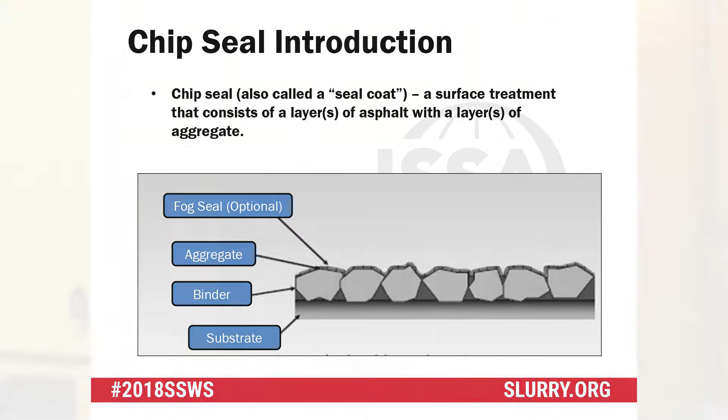So chip seal, also known as a seal coat, all it consists of is binder being placed on a roadway and aggregate being placed on top of the binder. That's it, pretty simple. It sounds simple, right? But sometimes it's not that simple when we construct these things. There's just so many variables, and we'll talk a bunch about those variables today.

So what's the benefits of chip seals? Well, it's going to increase the skid resistance. We're going to seal minor cracks, okay, we're not talking major, just minor cracks, 1/4 inch or below. It's going to extend the average service life 5 to 10 years, and that's a pretty big range, 5 to 10 years, but it's really dependent on the existing surface condition, right?

Because sometimes we have a surface that's maybe not in its optimal state to put a chip seal on, but we do it anyway because we just need to. It might be more of a stopgap measure, okay? So that's why this range is kind of so big, it really just depends, okay? It's going to correct deficiencies, raveling, flushing, aged, oxidized pavements.

What does it not do? It does not provide structure. Anybody over there yesterday in micro slurry, did they talk about that over there too? Pavement preservation is not really there to provide structure, okay? So we're not going to increase the load bearing capacity, nothing like that.

We're not really going to smooth out a rough ride. Usually a lot of times if your road's rough, you put a chip seal on, it's going to be rough again, okay? It's not going to bridge cracks wider than 1/4 inch. And then any ruts you have out there, it really needs to be very minimal rutting. I mean, we start getting into 1/2 inch or greater, what's going to happen?

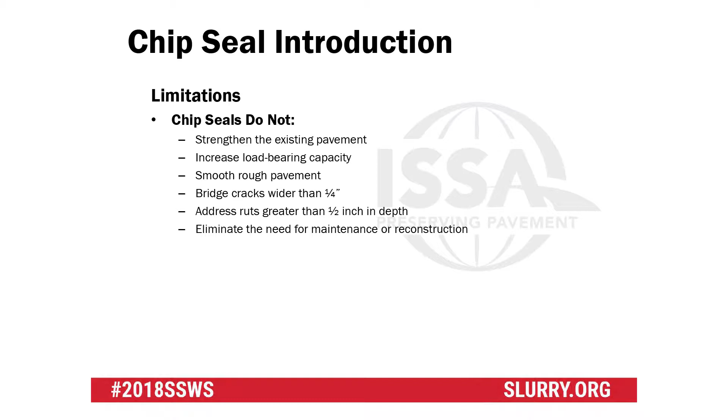Where's all your emulsion going to go? Or binder? Into the rut. And then what are we going to have? We're going to have a bleeding situation, a bleeding chip seal in the wheel paths, okay?

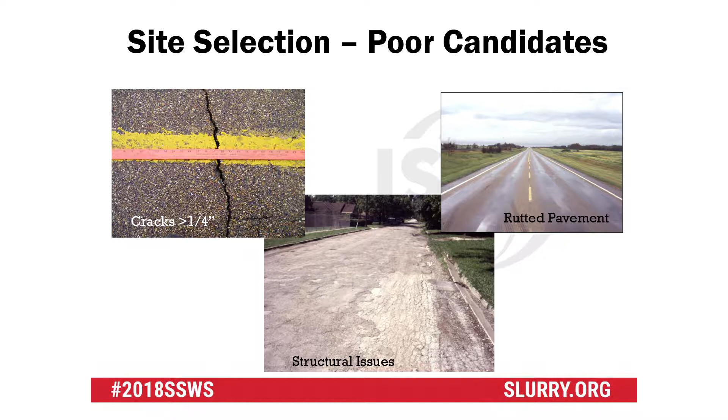So there's just some pictures of poor candidates up there. I know you can't see the ruler, but that's actually a crack that's greater than 1/4 inch. And then you see severely rutted pavement on the top right, and then just structural issues. This goes for any treatment you'll probably see or talk about this week, we need to make sure we have a good base.

A fog seal is not going to correct structural issues like that. I had a county one time call me out, wanted a fog seal on a road just like that, wanted to know if that would work. I had to tell it straight: yeah, it's probably not going to work out very well for you, but yeah, we can do that if you really want to waste your money. We need to make sure we have a good base structure out there.

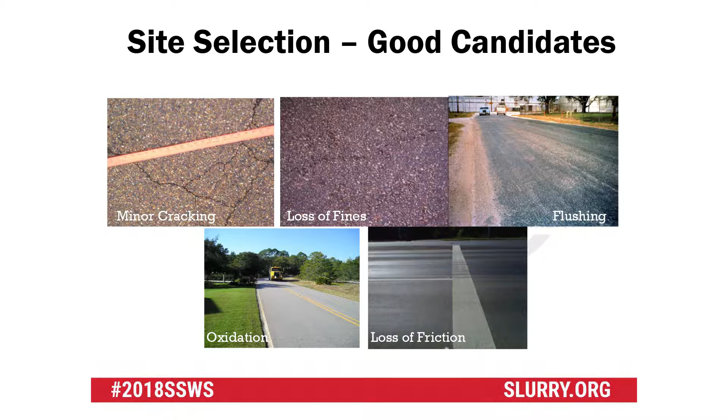So there's some of the candidates that are good: minor cracking, like I said, 1/4 inch or less, loss of fines, really slight flushing, oxidation, and loss of friction. Okay, so that chip seal should give you great friction numbers.

So where do we really want to treat it? We want to treat it at the top of that curve, right? Whether it's micro, slurry, crack, whatever, fog, we want to treat it at the top of the curve so we can spend our money very wisely, a very minimal amount. I think Scott Bartlett had a great presentation on his program, and a lot of his treatments are at the top of the curve. That's why he can improve the PCI of his network.

But sometimes we have a little stopgap measure, and I know when we were up in Fairfield, we talked about this summer with Scotty Bartlett. Sometimes you just got to do that. Sometimes there's just no choice. You don't want to, but you might have to do a stopgap measure.

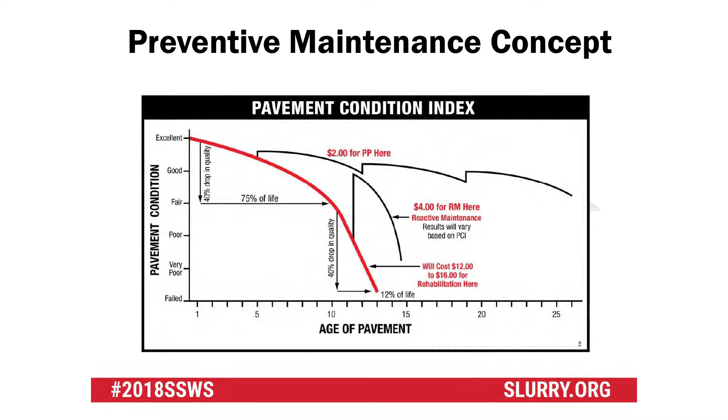And it's going to cost you a little bit more, but you can see what happens, right? It's going to go up initially, but then it's going to start dropping off pretty quick. The warts start to show themselves really, really quick in that. But hey, if it gets you 4 years, 3 years, 5 years, and that's all you're expecting, then that's good. It's all about the expectations of what you're wanting out of this treatment. If you do a stopgap measure with a chip seal and you're expecting 10 years, you're going to be disappointed, very disappointed, okay?

So you can see where chip seals fall, that good to fair category. Some of the treatments above that, below that, just showing you there where all the treatments fit on the curve.

All right, so let's move on here to material selection. Let's talk about aggregate first. So what are the functions of all this aggregate we're going to put out on the road? One is just to resist traffic abrasion, something for the wheels to drive on, improve the surface friction. It's just there to really let you go across that road. What the most important part probably is below that, that seals the road.

But what kind of aggregate do we want? Well, here's some of the factors that you probably want to look at or needs to be a part of a spec for aggregate: type, particle shape, toughness, soundness, gradation, cleanliness, and then absorption.

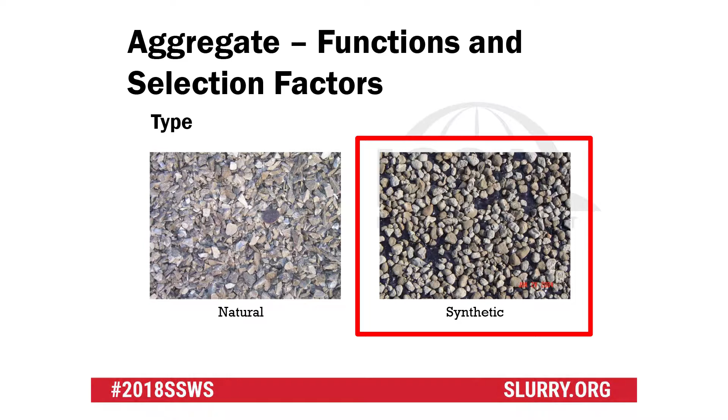So type. What would be an example of a natural aggregate? Granite, or limestone, all right? Something we find in gravel in some places. That's natural. What's synthetic? Maybe lightweight aggregate, something like that. Yep, that's synthetic. So both of these will work. It just depends on what's really locally available. I mean, everybody knows it usually in their area what's available, okay?

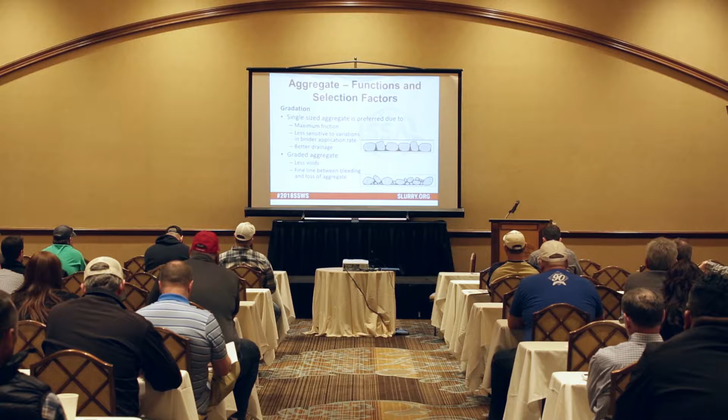So how would that affect us in a chip seal? Well, you can see right here, how we got little rocks, big rocks all over the place. But look where the binder is. We've got some of these rocks that have binder all the way to the top. We've got some binder that's barely up halfway on the big rock. So are our chances pretty good that that rock's going to stay? Probably not. And you can see how they're all wedged up against each other. They could end up popping some aggregate out. As a roller goes over it, a wheel goes over it, could pop it out.

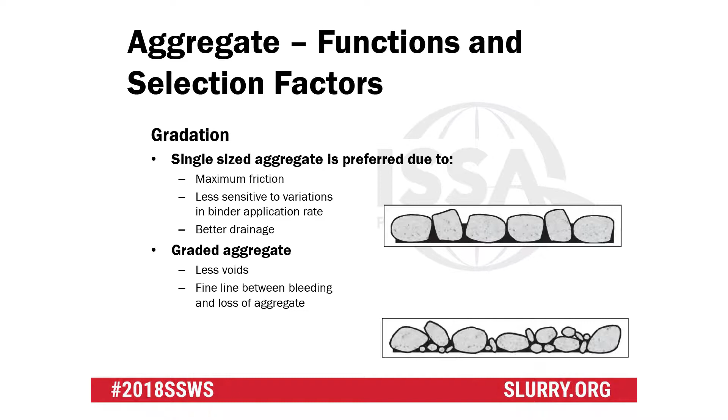What we would love to see is this top picture where it's all the same size. Now, is that possible all the time? No, because it does probably cost more money to get a single size aggregate. So a lot of times you have to do with whatever you have. And sometimes it is this. But if we can minimize that gradation - and I think we have one in our ISSA guideline, and AASHTO has one as well that's pretty similar - we can minimize that and give us a better chance of success.

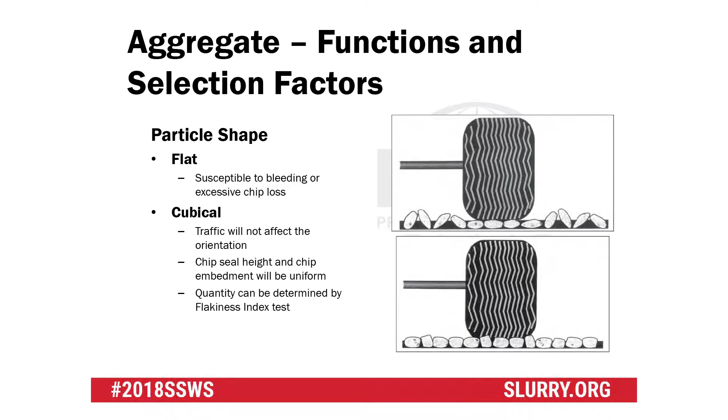But when the wheel hits it, whether it's a roller or the vehicle, what happens? What am I going to have now? What is my road going to look like? It's going to look black. It's going to be bleeding chip seal. I mean, I went from where it looked okay to now it's all flat, and now it's covered in binder. It's just basically drowning in binder.

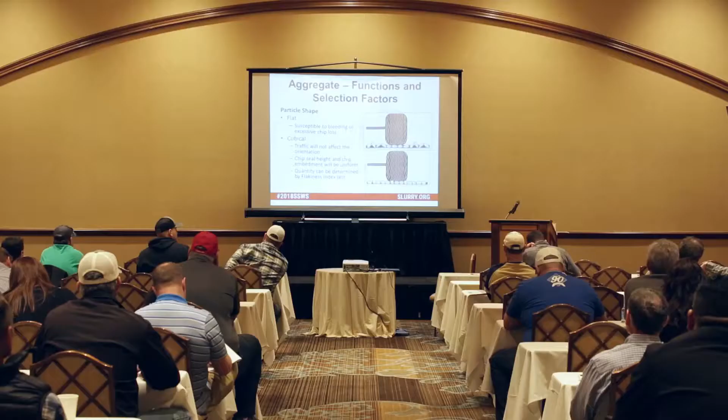So we need to minimize the flat and elongated. Big part of the spec. We would like that, like we said, more cubical sized, round and angular. So we've had some situations.

Has anybody used pea gravel or gravel just for chip seals before? Crushed gravel? Anybody? We've seen it, yeah, I've seen it some.

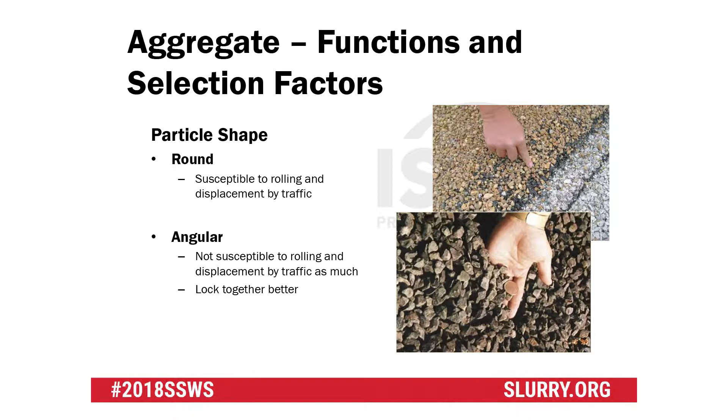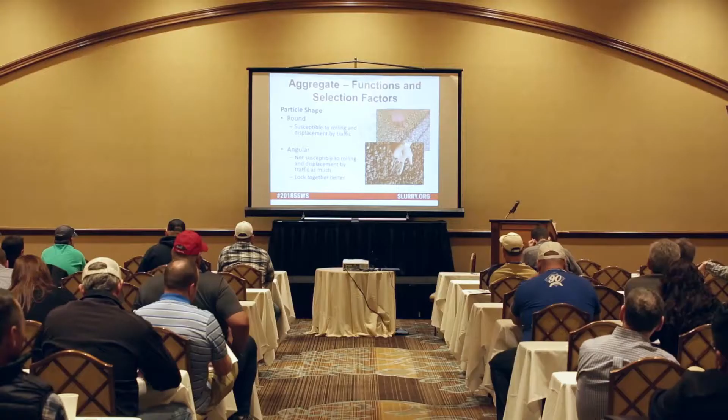Not a lot, but we have seen it some. You need to make sure it's crushed and get some fractured faces. The reason why, if you just put a little pea gravel out there, the roundness of it, it's really susceptible to rolling as you put a tire on it. It'll just roll off. So we want it to be more angular in nature. This is probably a big one right here.

Dust. So if we have a real dusty aggregate, and I have a binder down there, and we apply this aggregate, what is going to attach to my binder? The dust. Where's my rock going to end up? On the side of the road.

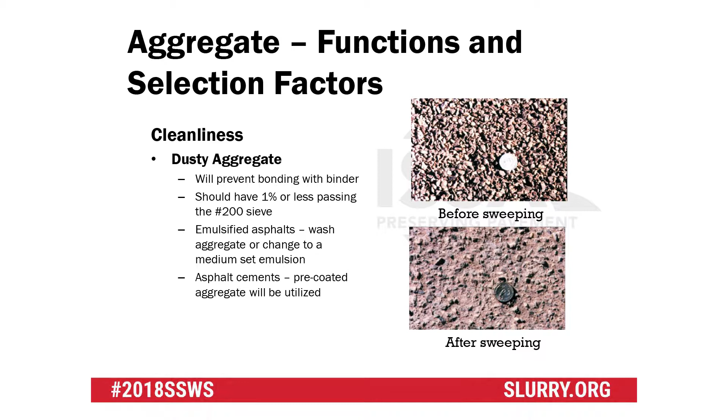Everything you paid for, the sweeper's going to just put it off on the side of the road. So we need to make sure we minimize that dust, and usually 1% or less is what we're shooting for. You start going up to 2, that doesn't seem like a lot, but it's a lot. If you can put your hand in a stockpile and have dirt between your fingers, that's a little bit too much, that's more than 2. We've had some that have to wet their stockpile to try to keep the dust down, and that's fine as well. So dust is a big deal.

Toughness and soundness - if we're in those freeze-thaw areas, you want to do some soundness tests. We want to make sure on the LA abrasion that it's going to resist the abrasion, degradation, and polishing. This is a picture of the LA abrasion machine. We just want to make sure that aggregate is sound and tough.

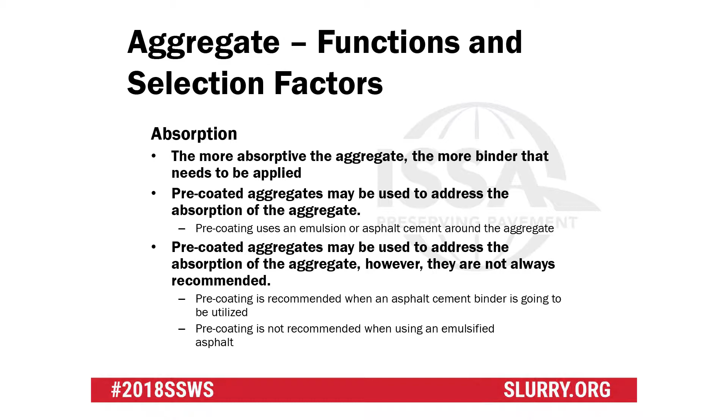And then absorption. The more absorptive that aggregate is, the more binder we have to put down, because it's going into the aggregate. So we need to know that up front if that's the case. Sometimes we have to use pre-coated aggregates, usually in a hot applied situation where we're using a pre-coat.

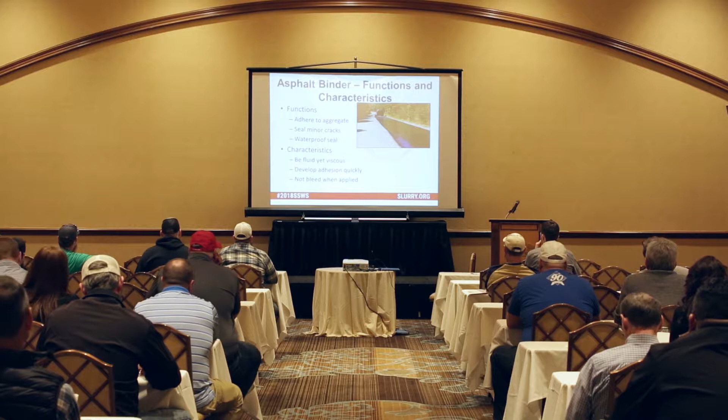All right, let's talk about binder real quick - the functions and characteristics. What does the binder do? The binder is there to seal the road. What's the enemy of this road? Water. In engineering school, that was the 3 words we needed to know: drainage, drainage, drainage. That was it, that's the most important part - keep the water out of your base. So we want to use that binder, whether it's hot applied or emulsion, we want that to seal those cracks and basically waterproof that surface. But we got a few things we need it to do.

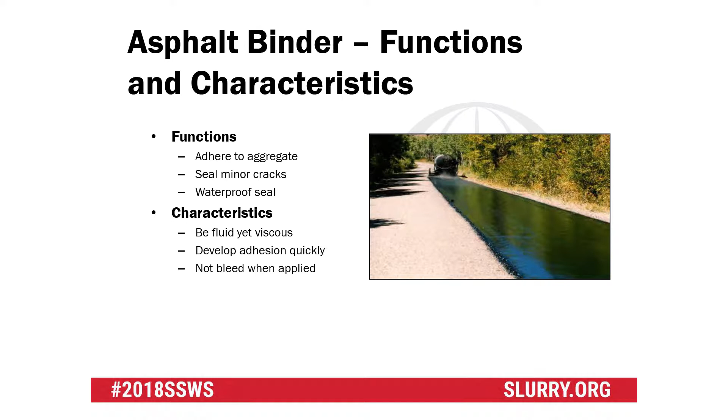We need it to be viscous, but not too viscous. We don't need it to be too thin. We need it to be able to get out of the distributor. If we spray it out of the distributor and we see it running off the side of the road, is that good? No, that's too thin - why go any further, don't go any further. Yet we don't want it too thick or it won't come out of the distributor. We want it to have some body to it so it can hold a rock. But we're going to be applying a pretty good amount of binder or emulsion on this road.

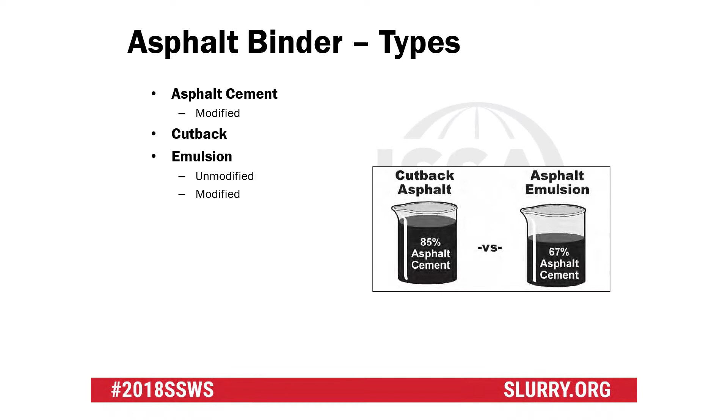So some of the types: we have hot AC, that can be modified - tire rubber, polymer. We've got cutback. Then we have emulsion that's unmodified and modified. Now, who in here does hot applieds? Okay, hot applieds. Can anybody do cutbacks in here? All right, I didn't have anybody yesterday either. And then emulsion - who does emulsions in here? Okay. So we can have just like a regular RS2, CRS2, or we can have maybe a CRS2P - it's got some polymer in it.

So what are some of the advantages and disadvantages of each? Well, one of the advantages with the hot AC is it's little to no curing period - we're ready to go as soon as it comes out. It's a quick return to traffic, and it has great aesthetics because you're usually using pre-coated aggregate, so it's going to look dark once you're finished. Going to make that striping pop, everything's going to look good. They're going to think it's a hot mix road probably.

But some of the disadvantages might be that you are dealing with a hot binder. Anybody ever seen anybody got burned by asphalt? 350-degree asphalt? It's not pretty. When you get it on you, you can't get it off you. So that is one of the disadvantages there. And then you got sensitivity to moisture and then just the cost of pre-coated aggregate. So if we're going the pre-coated aggregate way, there is a little bit more cost there for the pre-coated aggregate.

So let's talk about emulsion, some of the advantages there. Well, we have lower application temperatures because we have water in that emulsion. That's the conveyance method to get that asphalt out there. We're using water to get it out there. So now we're looking at an emulsion at 160, 165 degrees, so a lot cooler than a hot AC, but still hot. It'll still burn you a little bit, but it's just not going to be as hot.

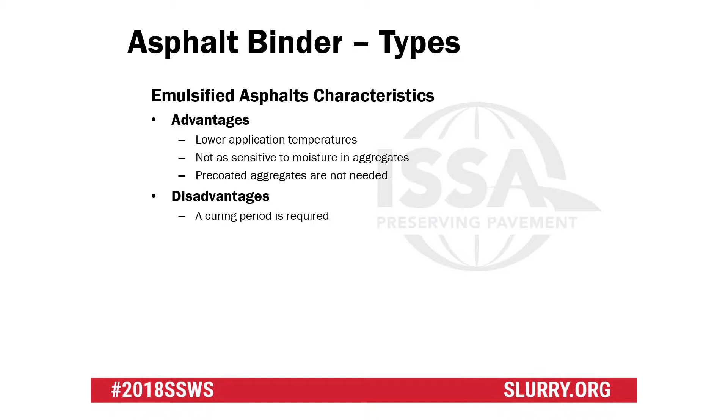We don't have to use pre-coated aggregate, but one of the big disadvantages is we are going to have that curing period there. It's not going to be a real quick return to traffic. You can, that's where we get into some of the polymers, but you're going to have to let it cure a little bit. Whether that's an hour, 2 hours, 6 hours, whatever that is, a lot of that depends on your environment, but you are going to have to wait.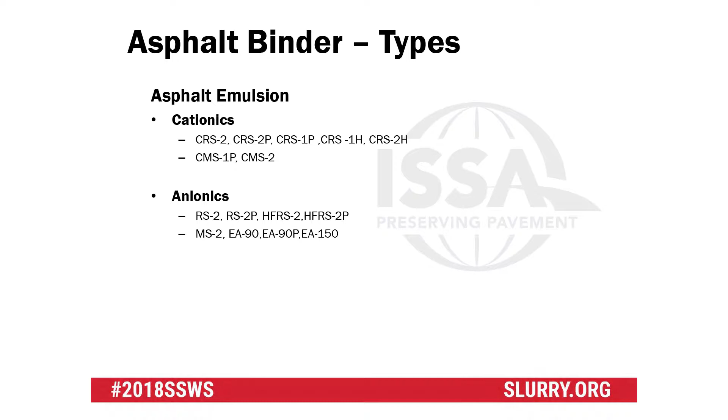And here's a listing of some of the cationics and anionics. So what does the RS stand for? Rapid set? Yep. What does the 2 mean? Viscosity, yes. So a 2 is a high viscosity emulsion. And if you ever see a 1, like a CSS1, like TAC, it's thin, or it's a low viscosity. So we could categorize these as maybe anywhere from 100 seconds to 400 seconds in viscosity, tested in the lab.

But we have considerations when we pick a binder. A lot of times when we pick a binder, it's because that's what's readily available. It's kind of like aggregate. Whatever my manufacturer is making, that's what I'm probably going to have to use. But in some cases, I might have a choice. I might have somebody that's doing hot applied, or I might have emulsions out there. There's considerations for that because each of them have a temperature requirement or what they're recommended to be used at.

Not only air temperature, but surface temperature. That is the one that kind of is the forgotten one. Everybody hones in on air temperature and they're just waiting on it to turn 60 or 70 degrees, and then I can go, but my project's in the shade. So what do we think that temperature on the road is? Is it the same as the air temperature? No. We need to have both of them done. Both of them need to meet that requirement.

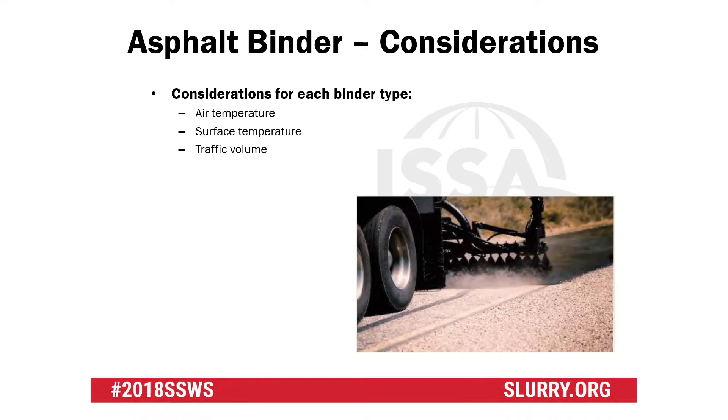Traffic volume, another consideration. So if I'm on an interstate in Texas or a roadway that has 100,000 vehicles a day on it, or 10,000 vehicles a day, might be a little different binder I use there versus one that only has 3 houses on it, where there's nobody driving down this road for 6 hours, right? That might be a consideration. Might be able to use one that's, let's just say an emulsion that's unmodified. It costs me less. It costs more to use modified materials usually. So if I'm going to put that cost into that emulsion, I need to make sure I get some value out of it.

So now we're starting to see more chip seal designs, and it's simply just a starting point for where our application rates need to be. There's a couple common methods, the McLeod method and the modified Kearby method. The McLeod method is really based out of MnDOT, Minnesota. Minnesota does a really good job of explaining the McLeod method. So you can go to their website or Google MnDOT chip seal design and it'll bring up their guide, their manual, and it's really, really good. There's also a little spreadsheet out there that will help you decide where those application points need to be.

But it's based on 2 principles. Number 1, it's 1 stone thick. Number 2, that all the aggregate is 70% embedded. Why would we want it to be 70% embedded, and not 50%, let's say? Why couldn't I do it at 50%? What's different about Minnesota, places like Minnesota? What are we worried about? Freeze thaw, snow plows coming through and wrecking on my rock, taking it up. So maybe I need to make sure that my rock is a little bit more embedded in the north where I get a lot of snow.

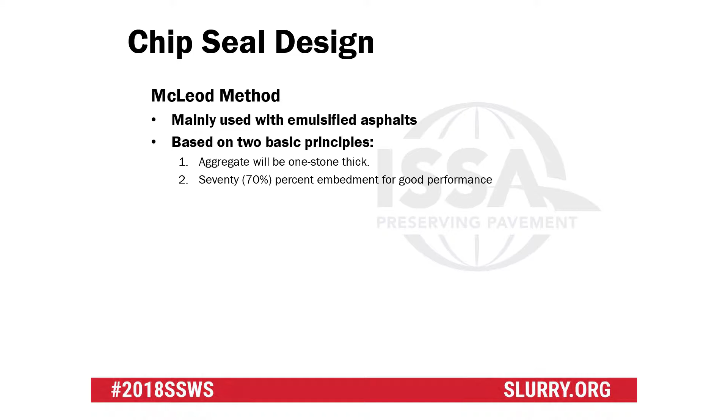Now, I can't say that, I'm from Mississippi. We've had 2 snow events in the last month. So maybe we should bump up our chip seals, right? But when we go further south, our chances of snow and snow plows are very small. So we usually use like 50% down there for our designs. Kind of gives us a quick and dirty.

But it's all dependent upon really the factors we talked about earlier on aggregate: gradation, the shape, what does your flat and elongated look like, or the flakiness index, bulk unit weight, specific gravity. If we can find all those measurables or metrics out on our aggregate, then we can plug them in very easily into this spreadsheet, and it'll basically tell us how much binder we need to stick that rock.

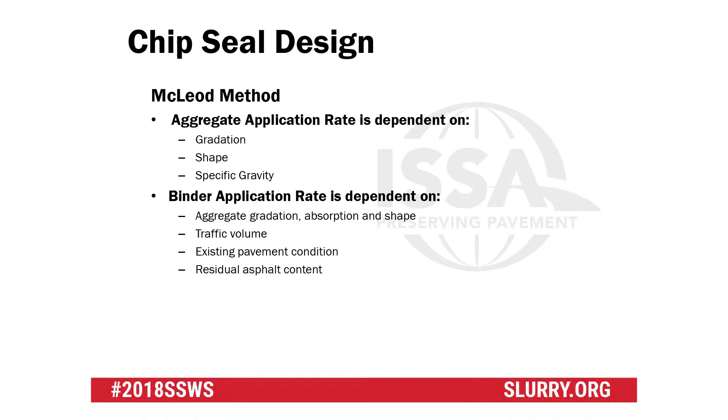On the modified Kearby method, this is more of a TxDOT method, or the state that uses it the most is TxDOT, or Texas. They also have a seal coat manual, very good, free. If you Google TxDOT seal coat manual, it's not called a chip seal manual in Texas, it's called a seal coat manual. Now, they got to be a little bit different.

We got any people from Texas in here? Okay, so nobody's mad at me.

All right, so it's really designed more for AC, hot AC. So you have to use some adjustments. They have little adjustment factors in there if you're going to use emulsions. But a lot of the same factors that you used in the McLeod method, you use in the Kearby method.

Now they have one little deal with what they call a board test, where they're going to physically put aggregate out on this 1 square yard of plywood, 1 stone thick. And then once they get all that covered, they're going to put it in a bucket and weigh it. And that's going to be your poundage per square yard. Pretty simple, pretty easy, okay?

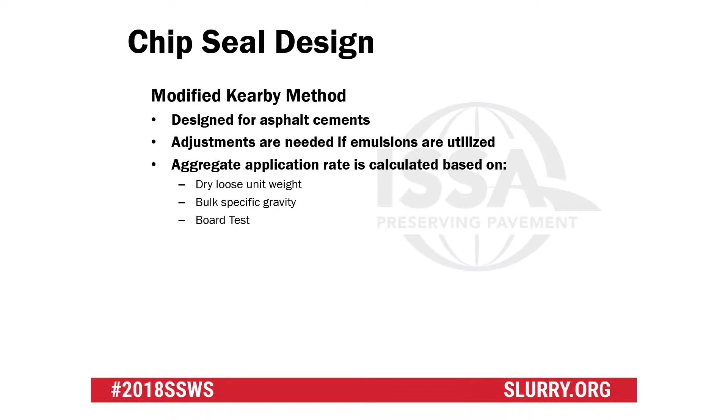So we also got, the binder is basically based on the embedment depth. And you've got traffic volume, existing surface condition. So if I have a slightly flushed surface out there, maybe I don't need to put as much binder on the road. If it's pocked and porous, maybe I need to put a little bit more binder on the road. Traffic volume can come into play as well.

So on that little spreadsheet that MnDOT has, it actually prints out a graph for you, and it tells you, okay, if you got this many cars per day, it's here. If it's this many cars a day, it goes up a little bit, up a little bit. So it kind of gives you some adjustments depending on what the traffic is.

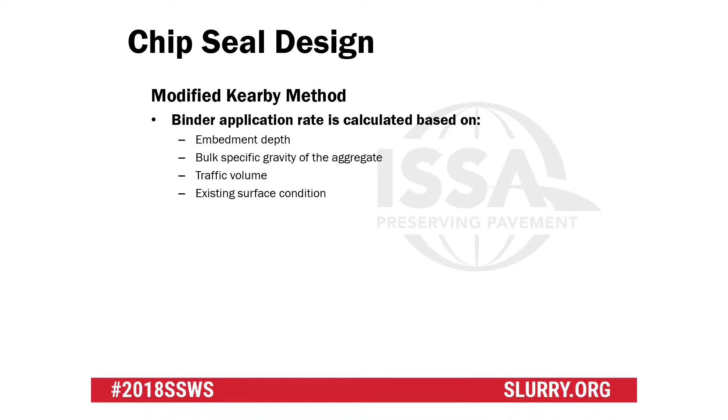One of the things I'll say about existing surface condition is when we see more and more of these full width patching or leveling out on the roadway, and they go for a long way. So we've got a design based on an existing surface condition, but right before we get to do it, they go out and level the road, put a bunch of new hot mix on the road.

So we're going to use our binder rate. What happens to our binder when we apply it to this fresh leveling or patching? It absorbs it. It's thirsty. It goes right down into the leveling. And then what happens? I put my aggregate down, I use the calculator, everything's good. I put it down, and I come back and my rock's on the side of the road. Why is that? Well, it just didn't have enough binder.

So we're really preaching more now about if you've got patches, you've got leveling out there, there's nothing wrong with that. You just need to take that into account. So one or two things need to happen. Either you need to spray more binder on the road when you're going down the road with your distributor, or you need to go out and fog seal it before you even start. Seal off those patches. Yes?

I would just fog seal it, that's easier. The only problem that we get into sometimes is that if the job is set up and it had leveling or patching in it, the engineer might not have it set up for fog seal. And so then you run into the case of you might not get paid to fog seal it. But it could be in your best interest to fog seal it. It's pretty cheap insurance out there.

This was a slide that was in Tom Wood's presentation a few years ago. I just put in there some rules of thumb, like, you know, 0.01 gallons of binder equals 1 pound of aggregate. So if you're using an application rate of 0.35, it's 35 pounds of aggregate. Gets you close. I thought that was pretty neat. So, I just threw that in there.

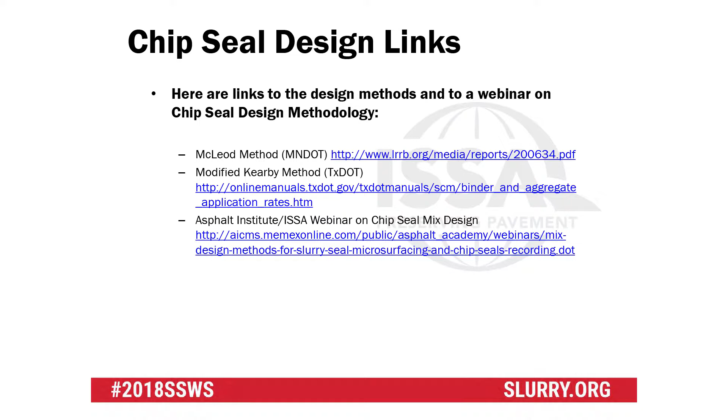Morning, everybody. I'm Brian Horner, I'm with Etnyre. I've been around Etnyre for 30 plus years. I know I don't look that old, but I started when I was real young.

So, anyhow, we're going to talk about distributors. We're going to talk about the equipment on a chip seal job. So we'll get into brooms and rollers and distributors and chip spreaders, and we'll talk in depth a little bit about the distributors and calibration and how to check calibration, stuff like that, where we run into issues with it, maybe a few problems on job sites. So any questions that you have, feel free to ask them at any time.

But on a chip seal train, that's what we call it, the chip seal train. Normally you're going to broom out front, make sure that all the dirt and dust is off that road so our binder has a chance to stick. We're going to follow it with the distributor truck and spray in that metered application that we want. Then we're going to follow that with a chip spreader, hopefully fairly close. We don't want a big distance between our chip spreader and our distributor. And then we're going to roll it, and we want to roll it as quickly as we can to get those rocks pushed down and oriented into that binder accordingly.

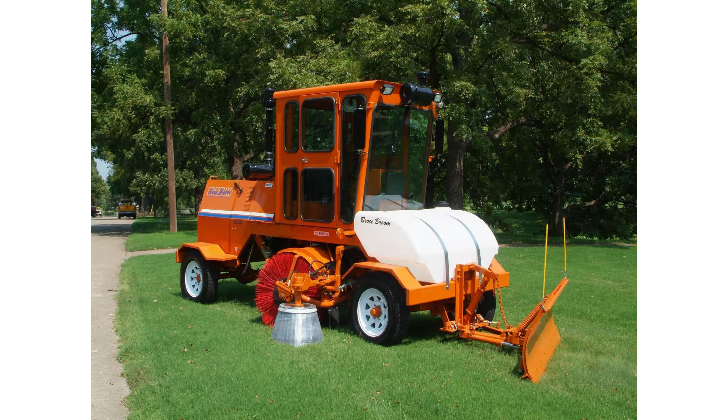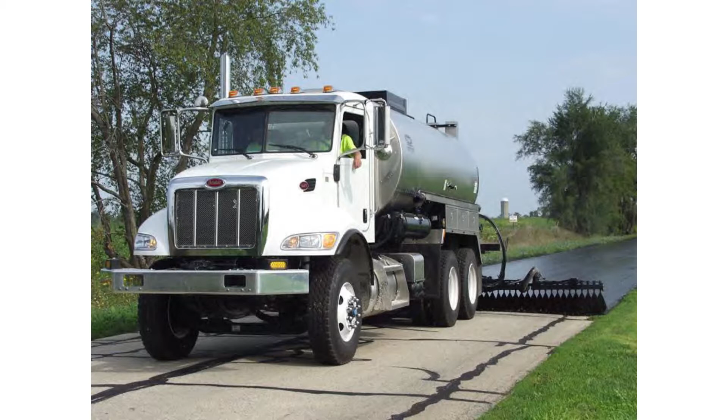So mainly power brooms are out there. In my experience, you want to sweep that road, blade the edges back if you can to make sure you're sealing all the way out to the edge, because vegetation starts to grow in and our roads just get smaller and smaller. So we want to blade that stuff back, then we want to sweep it real well. Then we're going to follow it with the distributor truck, spraying at the metered application, followed by a chip spreader, whether we're doing single lane or full width.

How many people do full width chipping? Okay. There's advantages and disadvantages to full width chipping. The biggest advantage to me in full width chipping is we get rid of the center seam, and that's normally where our failures are, or when we do that overlap. So we get rid of that.

There's a few disadvantages to it. You got to think a little bit more where you stockpile and how you bring your trucks in. Sometimes people are worried about traffic control on full width, they just say they can't shut the road down. But if you're in a situation, and we've done the study, if you're running a pilot car so that you're stopping traffic, even though, to let cars stop so you can pull around the chip seal train, if you're doing full width...

Missouri does this a lot. They'll allow you to chip seal for 20 minutes, and then you have to pull off. You do it full width, and then let traffic do its thing, and then shut it down for 20 minutes. And they found that they're holding drivers up less time by doing that than running a pilot car situation. And they feel they get a better job because it's uniform all the way across, and they get rid of that center seam. Then we're going to roll our chip seal with a pneumatic roller.

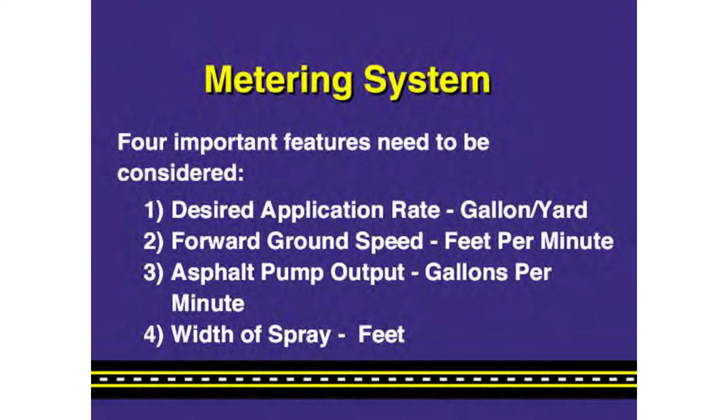What about our metered application? That's really what we're here to talk about. How do we get what the method or the design that we're asking for, how do we get it on the road? What goes into a distributor to do that? You're going to figure out what you want for an application rate, right? Somebody's going to tell you that. Okay, now what speed do I drive, and what does my pump need to turn in order to get the application at the width or the number of feet I've turned on my bar? How does all that work?

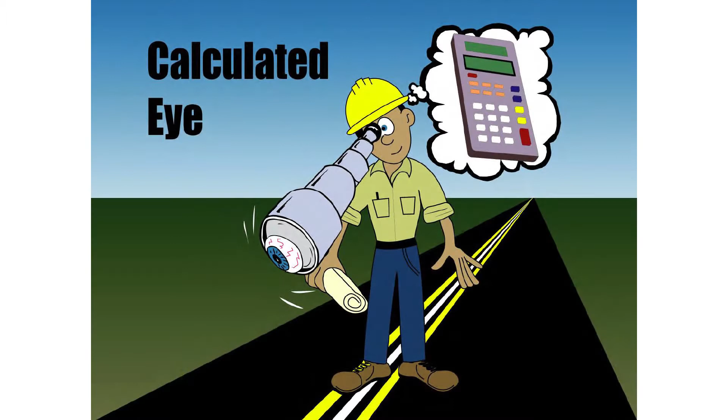Well, it's actually very simple. You can get a metered application in different ways. You can do it this way if you wish. I'd prefer coming out of the back end of a distributor, it's a little cleaner and a little less work. You can use the calculated eye, which Larry pointed out that we used to do. I mean, a lot of guys could actually look at the road and say, yeah, that's 35 hundredths, and he would be pretty accurate because he's done it for 20 or 30 years. Now it's punch the number into the computer and hope everything is set right in our gallons per square yard. Is anybody using metric?

Nobody's doing metric? In liters per square meter? So on distributors, even from the beginning of '93 when we started, all of our distributors are capable of shooting metric. You just have to go into the computer and flip a switch to change it over from gallons per square yard to liters per square meter. So if you ever get any jobs that need metric, you can actually shoot in metric.

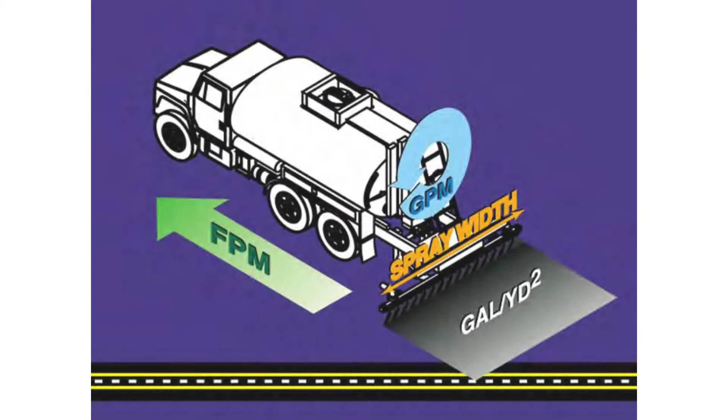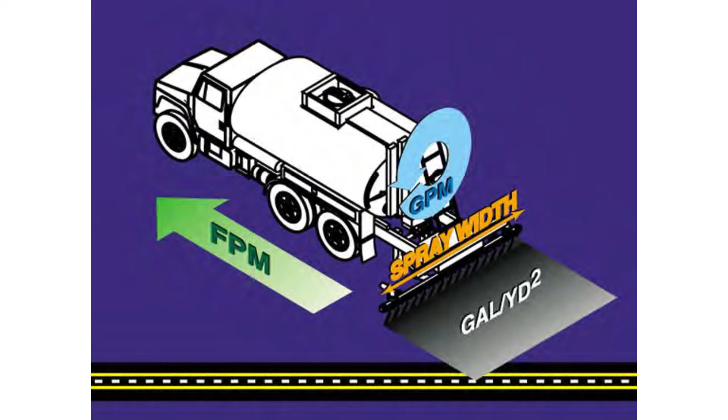But here's your four things. The faster I drive or the slower I drive, my pump changes in order to get my gallons per square yard I want. If I change my spray bar width while I'm spraying, my computer sees that and changes my pump to give me that same rate.

If I change my rate—distributors, Larry was talking about going over those patches—every distributor has a series of memories in the computer, maybe 5, maybe 10, depending on what brand or model you have. You can change the application rate while you're spraying. So a lot of times guys will set up, if my job calls for 0.35 gallons per square yard, and I come across one of those patches Larry was talking about and I need 0.4, we just set a memory at 35 and 4. As I'm driving along, I can reach over and hit that memory, and in an instant the pump speeds up and gives me 0.4. I get past that patch, I hit the next memory, and it slows back down to my 0.35.

Now, I would not suggest that an operator continually punch those buttons—you'll drive a chip spreader guy crazy—but for those long patches, or maybe you hit a concrete section or something, maybe you want to back that oil down a little bit because it's not going to soak up at all. So you can change your application rates as you go to vary for your road conditions.

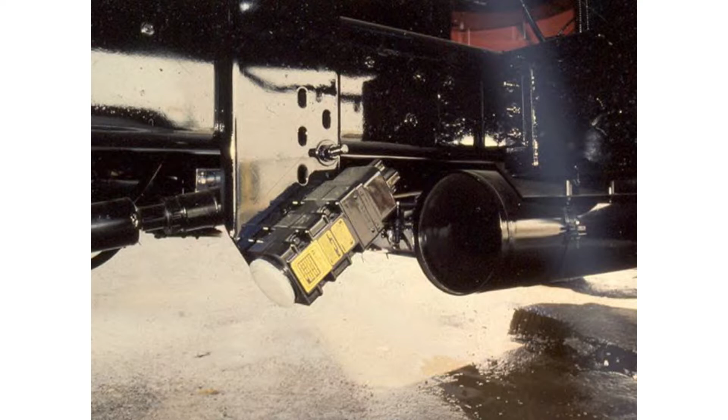It's all based off of ground speed. Now on Bearcats, they put a sensor in the rear axle that's counting the rear end of the truck to tell us how fast we're going. That's what's feeding their computer. On an Etnyre, we use a radar. But in both cases, if we're not getting the correct ground speed and the correct distance, our computer's not putting out the application that we're asking it to give. So radars become very important.

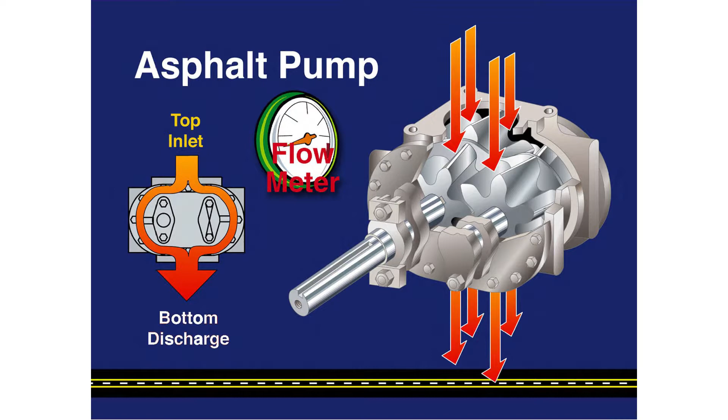We have asphalt pumps that have speed sensors on them so that we're counting revolutions of our pump. On a Bearcat, every time that pump turns one revolution, they know that they're getting one gallon of oil out of that. And on an Etnyre, we're getting 0.61 gallons of oil. So our pump actually turns a little bit faster, but it's just a way to count the revolutions to feed back into our computer.

But on your settings of your spray bar, in chip seal we want triple overlap. That's what every manufacturer of a distributor looks at. Nozzles are on 4-inch centers, so that gives us triple overlap. We want 12 inches from the bottom of the nozzle to the ground, so our fan is 12 inches at the base, which then turns and gives us our perfect triple lap over application.

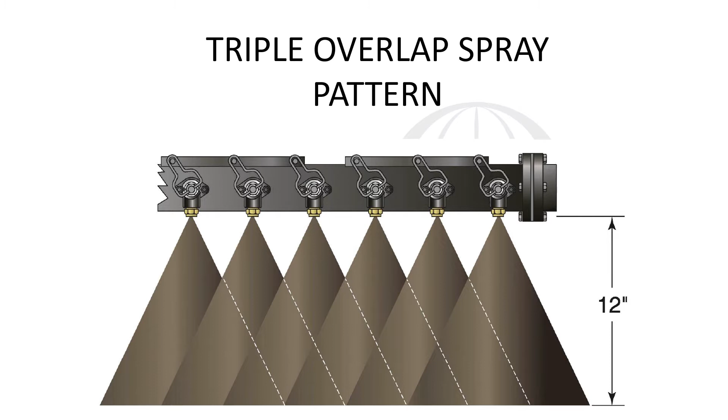That's what we're after. So if you've got a big crowned road and you're doing full width, and your center bar is 12 inches off the road—maybe less because of the crown—and your wing is 3 foot off the shoulder, you're not getting uniform application out there. So we need to crown that bar down a little bit and make sure we try to maintain as close to that 12 inches as we can to get triple overlap.

The nozzles are really important. We used to use what we call coin slots—just a slit in a nozzle. They work fine for hot applieds, but they don't work very well for emulsions because emulsion tends to stick to the edges of the nozzle, and you get these really heavy edges and not good uniform in the center. So everybody uses a football shaped, a cat's eye, a multi-slot, a V-jet, whatever you want to call them. If you look inside the slit of the nozzle, you'll see that it's a football shaped orifice in there. That's what we need for emulsions, and they work for hot oils too, so most people don't use coin slots anymore at all.

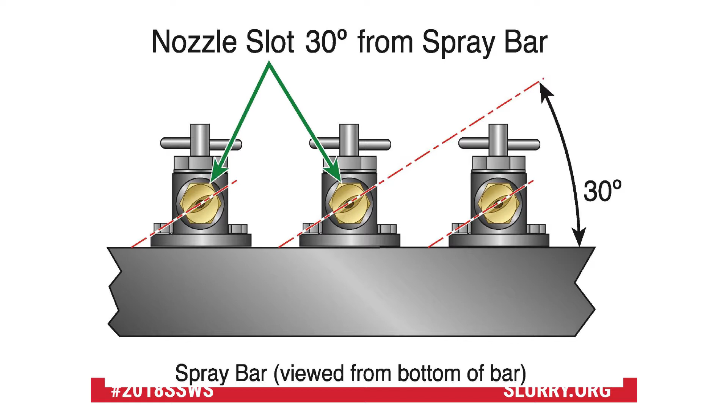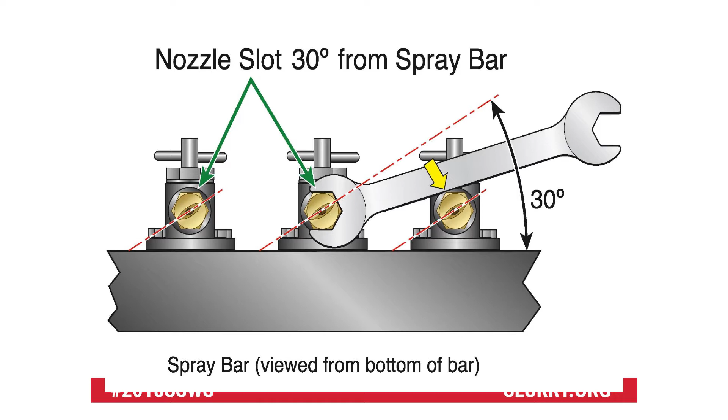But they all need to be set at the right angle. If my nozzles are all twisted on my spray bar, I'm still getting the right volume, but I'm not getting a good pattern. So I want to set those at 30 degrees all the way across the bar. We send a little wrench with you so you can put it on the nozzle and match the next one, so that sets our 30 degrees. It doesn't matter if the 30 degrees are slanted the way the picture shows or the opposite, as long as all my nozzles on my bar are set at 30 degrees. That gives me my triple overlap.

Lots of different nozzles out there. We can pick small ones, big ones, little ones.

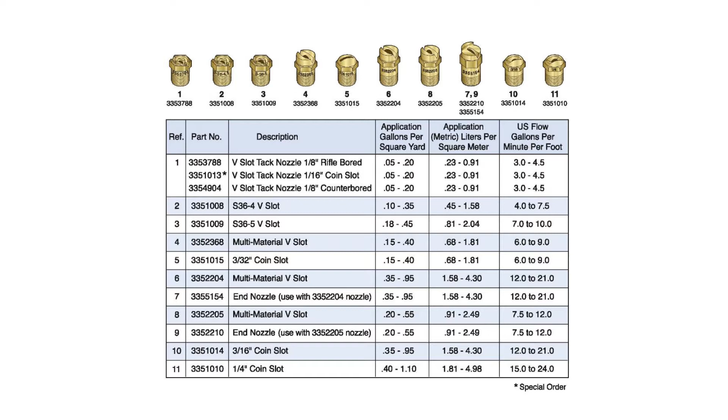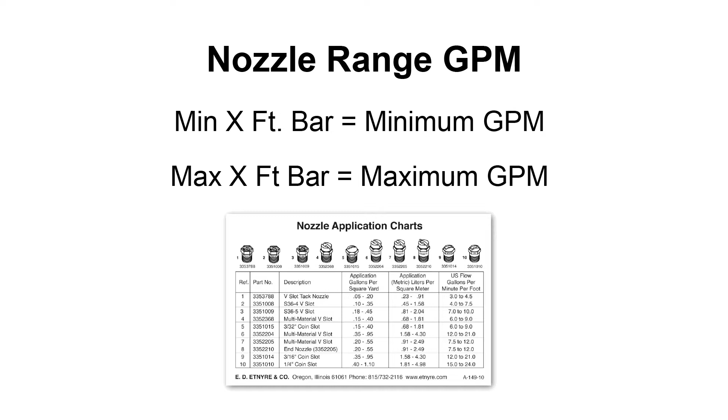Here's another way to figure out how I should drive my distributor. If I don't want to look at that app and go by speed, get the speed range in there, I can do it by gallons per minute. Because I don't even look anymore at the application rate a nozzle will give me. I don't know if it's false information, but it's misleading information. We look at how much product that nozzle will actually flow at a minimum and a maximum and still give you a fan. So we basically take and multiply how wide we want to go times the minimum and maximum of that nozzle, and that gives us a gallon per minute range.

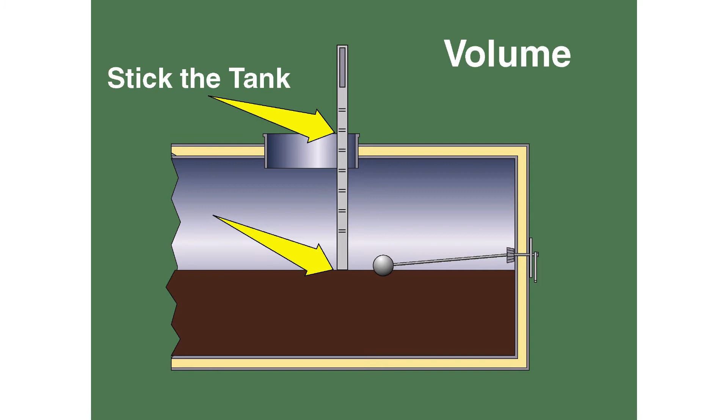On a job, to check volume of what we sprayed, the most accurate and simplest way is to use the measuring stick. It comes with every distributor truck. On an Etnyre, you put it in the manhole and just touch the top of the oil, and you read at the very top. That tells me how much oil is in there.

So if I was gonna, and I've done this a lot, make sure everything's all right volume-wise, park your distributor truck somewhere, put a couple paint marks where your tires were at, stick your tank, go spray for a while, come back, put it in that same spot, re-stick the tank, and see if my gallons that I still have left or that I used matches what I should have shot. That's the easiest way to check the volume calibration on a distributor.

You have to realize that those sticks are specific for a certain tank size, okay? So you can't just take a stick and use it on any distributor, because we have to know what the size of that tank is. Is it this big, this wide, this tall? So there's one for every distributor.

A Bearcat does it just the opposite. It's reverse calibrated. You put the stick in the manhole all the way to the bottom of the tank and pull it out, and wherever the oil line is, that's what you got left in that tank. Then you got to wipe the stick off. Etnyres just reverse it so we don't have to get the stick dirty, that's the only reason for that. But that's one way to check it.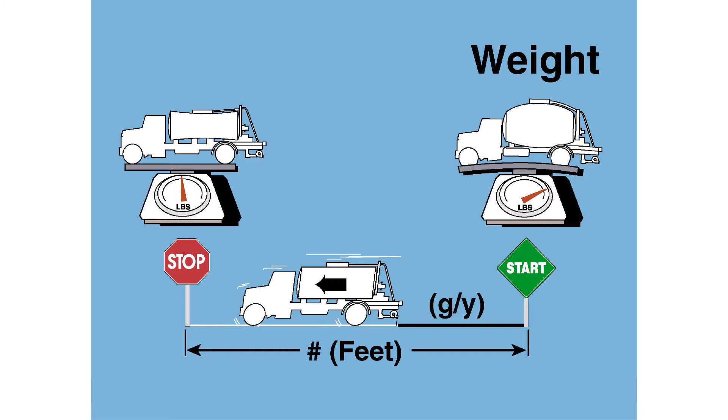Another way to check it is by weight. If you're a contractor in Chicago, there's no chip seal in Chicago, it's all paving, but you have to spray tack for that paving. The state pays you by the pound of residual asphalt, so they want a ticket. So you drive into Chicago, your asphalt plant's out on the edge of Chicago because there's none in the city. You drive in, you spray a few hundred gallons, and then you have to go all the way back out to your plant and reweigh to give them a ticket that says I shot this much by weight.

We actually put weigh scales on distributors now, certified weigh scales. They're expensive and they have to be calibrated and certified by the state so it will print a ticket off in the cab that tells you today's date, temperature of the oil, how many gallons, how many pounds - all that stuff's on a certified ticket and you can hand it to somebody. But that's not practical on most jobs, though it is a way to check the calibration of that distributor.

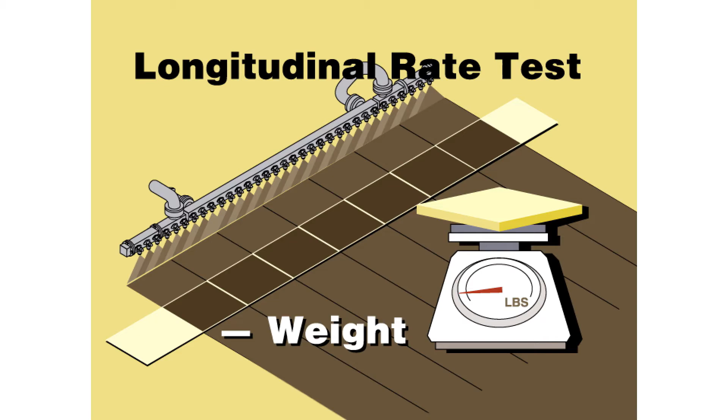The other way is a longitudinal test. Anybody do a test like this before? You're spraying over some pre-weighed pads, reweighing them after you spray, and by weight you're figuring out if the volume coming out of that spray bar is correct. Now the longitudinal test will tell you not only is the volume correct, but it will also show you that I'm getting consistent all the way across the bar. The other methods I showed you, the weight and the stick, just tell me I shot the right amount. It doesn't mean I actually got it equal all the way across the spray bar.

But longitudinal tests are very popular. If I am a contractor and an agency requires a longitudinal test and they're doing that, I would do one myself also so I can verify their results versus mine, because if somebody doesn't do it carefully, they dump some off the pad or mix them up, and you can get different numbers there.

The rest of this goes pretty fast because chip spreaders are pretty simple, okay? What did we talk about at the break? What's the job of a chip spreader operator?

Cover up the distributor operator's mistakes. That's all he does all day long, okay? But the trouble is, if the distributor operator makes a mistake, he can cover it up for so long, but because chip seal's one rock thick, you're going to see that mistake later. So you can only hide it so long.

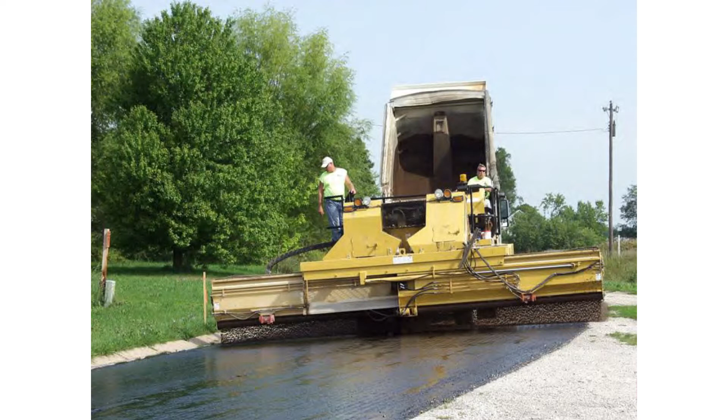So you can do single width boxes that we have out there. We got full width boxes that cover everything all in one pass to get rid of that center seam. But the chip spreader basically is to apply that aggregate at a uniform application so we can save money.

We want that rock to be the minimum amount. If your design says it should be 30 pounds and we calibrated our chip spreader so we're getting 30 pounds, I'll almost guarantee you that in the real world you're not going to spread 30 pounds. That's going to come down to 28 or 26 or 22, because even though we're putting that uniform rate on there and we're set it as a design, we still want one rock thick, and we want what we call a salt and pepper look. We want to see a little oil when you look down around those rocks, so when they get rolled, they have a place to roll into the binder so they're able to stick.

If they allow me to do this on a job, I will start out a little heavy and I'll keep backing it down until I start to track a little bit, and then I bring it up to my tracking stops, and that's where I want to be. Because you don't want excess rock out there that you're going to have to broom off. That just costs you time and money and windshields.

So we want to put down the right amount, but I've never found a spec yet on the McLeod or whatever that we actually put down that amount of stone. It always tends to be a little lighter.

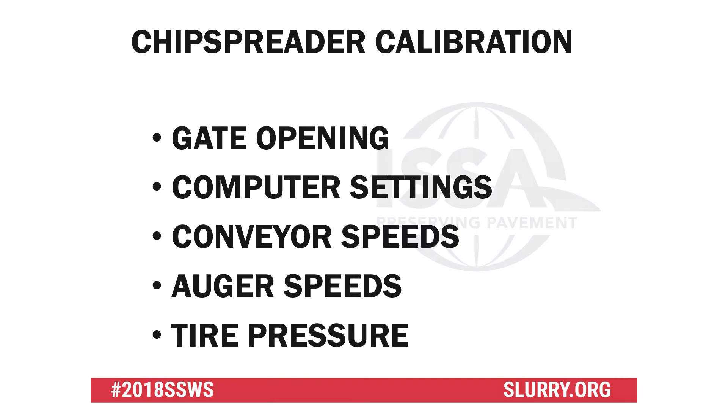So, and then what about tire pressure? Why do we care about tire pressure? There's no suspension on a chip spreader, okay? So if I got my tires pumped up to 120 pounds and I hit a little bump, it bounces the machine a little bit and I start making those washboards or rub boards in my road. So the tire pressure needs to be set down to 65, 70 PSI so that I got a little softness to those tires, so when I hit a little imperfection in that road, I'm not starting to make it bounce. So that's why tire pressure becomes part of calibration.

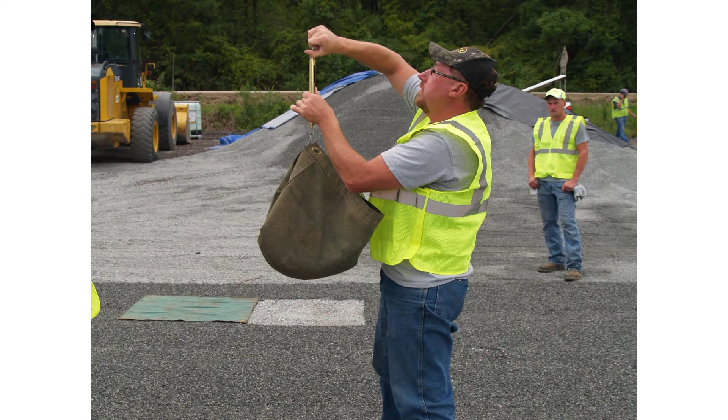How do we calibrate it? We actually chip over a 3-foot by 3-foot tarp and weigh it. We set on our computer, let's say we want 25 pounds, 3/8 chips, and we set a speed that we want as our cruise control, our maximum, so we can just shove the stick forward and go, and run over those tarps and weigh it. This is coming out to be 21.5, but I got to deduct 2 pounds for the weight of the tarp.

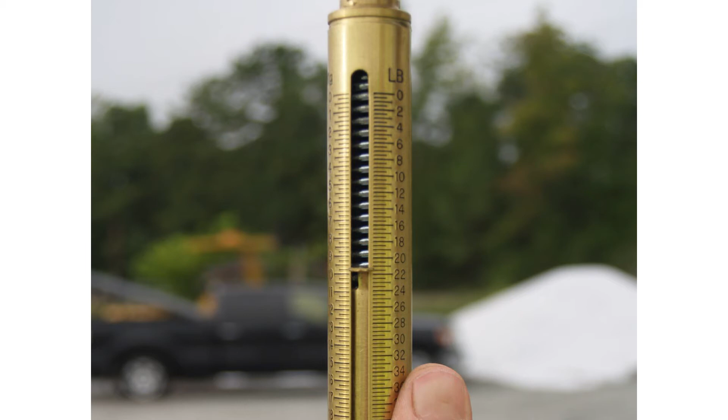So as I speed up and slow down, my gates will open and close, but if I need less or more rock on the road, when I adjust my rate switch on my computer and say I need a little bit more, it opens up a little bit more and I'm all within range.

You can run a chip spreader without ever calibrating it, just use your eye. But if I get out of whack, I may run into that situation where I push the stick forward and the computer says I can't make it go any wider because you're telling me I'm at my max. And then you can't get your rate.

Every rock is different, so 3/8 chips from Bill's quarry may calibrate different than 3/8 chips from Ron's quarry. So there's memories there you can save for different sizes, or maybe 3/8 chips versus one quarry or the other.

When we're talking about distributor mistakes, I set two memories together. If I want 22 pounds on my main road, I set it at 22 pounds and everything looks great. Then I set the next memory at maybe a little slower speed, and I set it maybe at 24 or 25 pounds.

Why do I do that? Because when you do a radius, the distributor always tends to overlap. No distributor operator is perfect to give you the exact amount of oil on a radius. He's going to overlap a little, and a lot of times you chip through that and you're bleeding a little, so then you chip it again. Well, if you just went to a different memory and put a little more rock on that radius, then you don't have to chip it twice. So it's easy to change those memories back and forth.

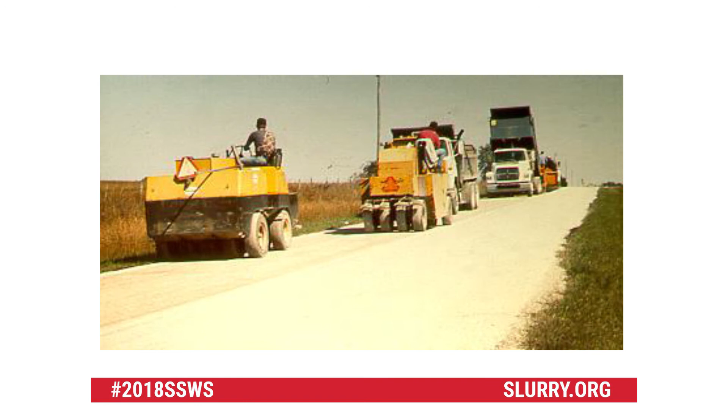What about rolling? Jason's going to talk about that, the construction end, but rolling, we talked a little bit about that earlier, is very important to a chip seal. This is a very good thing, they got a couple trucks in between the chipper and the rollers. You don't want 15 trucks in line and then your rollers.

How many rollers do you need on a job? Depends on how fast your chip seal train is going. You don't want your rollers 3 miles behind you because the oil's setting up too much before it gets rolled. You want those rollers close.

Jason will talk about tire pressure and all that stuff, but your dump trucks are basically your best rollers. They're the ones that are on the job first. Stagger those wheel paths, so you're not driving in the same path, and let those big dump trucks be your first roller on the job. That will help.

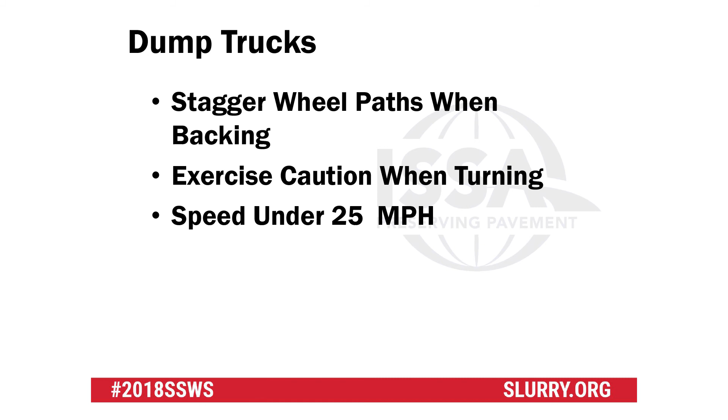So dump trucks, stagger your wheel paths, keep them at a slow speed. Try to plan your jobs, whether you stockpile or pull out of a quarry. If you're doing one lane at a time, your dump truck's always coming in from the head of the job so he can pull in behind loaded and back up to the chip spreader and not have to turn around on your fresh chip seal and scuff it all up.

If you're doing full width, now you're closing the road down to a certain point, so now maybe I got to come in from a different way. I can't always come in from the same direction. So you always want to chip seal away from your stockpiles.

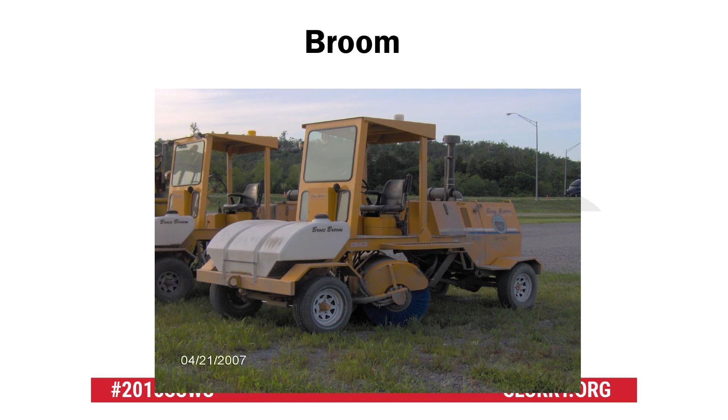Brooming, Jason will talk about that, but chip seals need brooms, most people need to or should, but if we keep that rock to a minimum, we don't have a lot of brooming to do. I always say you're not trying to shoulder your road when you chip seal it. So I don't want to broom everything off and put rock in my shoulder because I wanted to shoulder the road. That's not what chip seal rock is for. So try to keep the rock down so we have a lot less brooming.